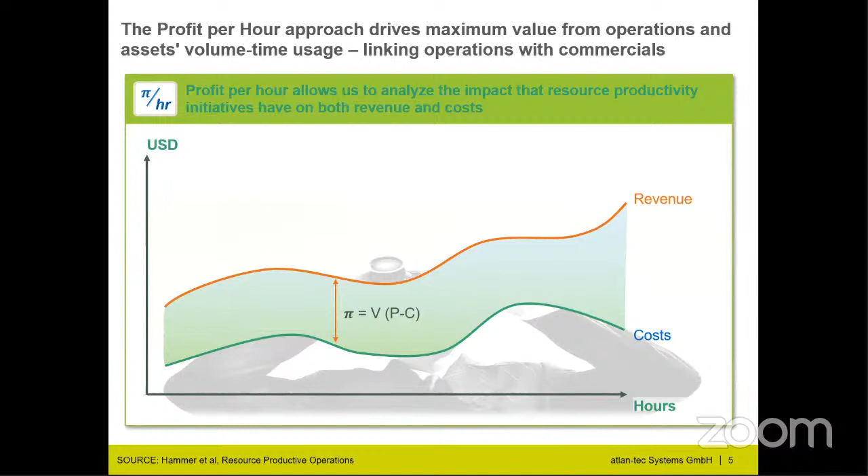But to get this high level of control, you need a deep understanding of the relationships in your process, and that's the reason to use big data analytics. Only this way can you understand how to influence or change manipulable variables to increase your profit. That's the basic idea: if you have a successful project, you can reduce costs and increase revenue, and at the end make a higher profit.

One way to do this is to put your historical plant data - all pressures, temperatures, levels, flows, analyzer signals, laboratory values - into a table. With this table of historical data, you can perform advanced analytics or big data analytics.

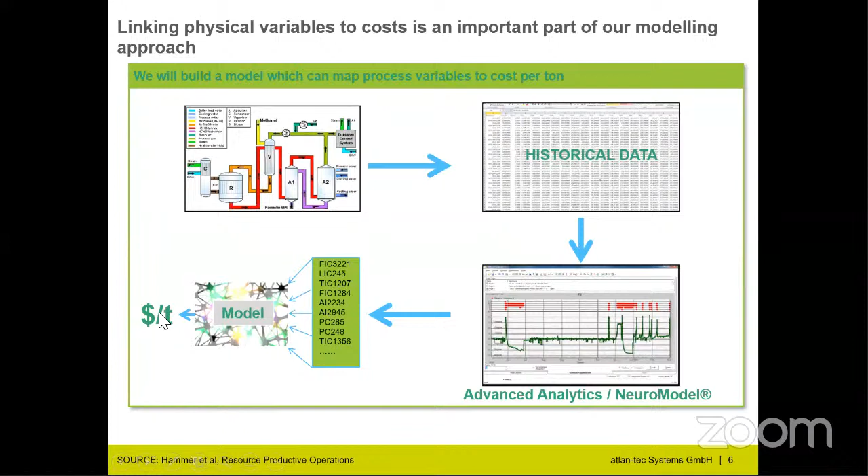We have a tool called NeuroModel, and at the end you get a model with a relationship, a function between your physical variables - some of which you can change or manipulate - and the output of the model is your profit per ton, per hour, whatever. That's the basic idea.

If you have a model like this, you can use it together with an optimizer. You may have one or many KPIs, and you use this model to determine how to manipulate these variables so you achieve your given target quality at the lowest cost. What you see here is a very generic scheme.

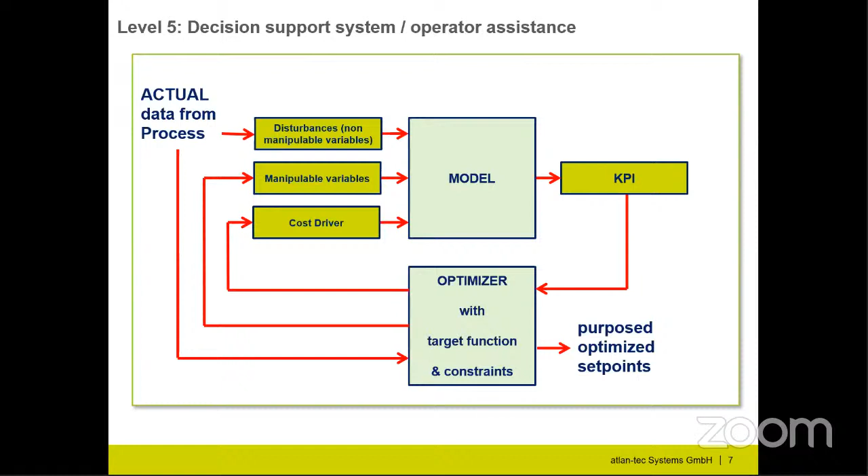At the end you have a precise model that can generate a prediction of quality, of yields, of whatever you are interested in. You get the actual data from the process, and the optimizer calculates the best values for the manipulable variables, generating proposed optimized set points for the process. That means every minute your production will be in an optimal state, and you can maximize your profit.

Okay, how can we do that? My answer is very simple: follow VDI 3714. The VDI 3714 is a standard I would like to present to you, developed in our standardization committee.

We have two initiatives: the standardization committee 727 and the standardization committee 724. That's Richtlinienausschuss, German for standardization committee.

One is STEPS. You have heard about STEPS from Sebastian Schmitz. The chair is Dr. Violett Zeller, and the aim is an objective measurement of the maturity of Industry 4.0. I have told you something about that activity before, and you have heard it from Sebastian.

The second is my working group, or standardization committee. This committee is called Big Data in Production, and we have developed the VDI 3714. The name of the standard is Implementation and Operation of Big Data Applications in the Manufacturing Industry, with the target to optimize your profit. I'm the chairman of this committee, and the aim is to standardize the use of big data methods.

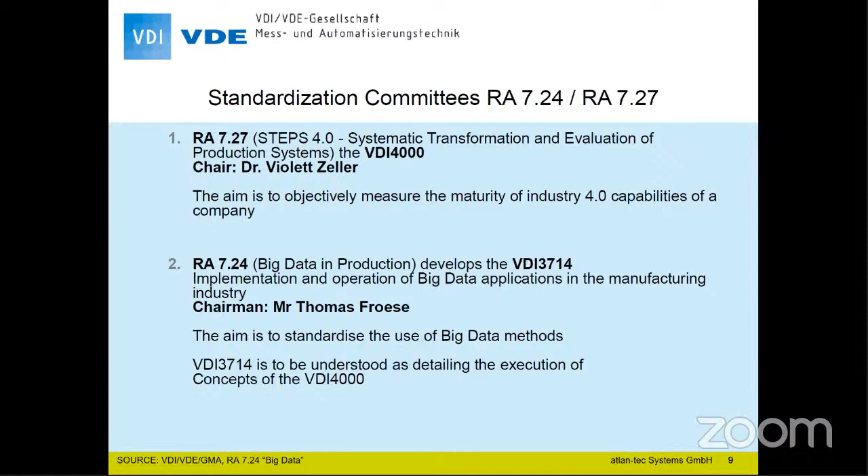Here you can see we have 30 active members. Some companies: Siemens, BASF, Clariant, Wacker, SKZ, IBM, Fraunhofer - some of the companies you will know. I'm absolutely sure these 30 active members are the best people in Germany active in the field of big data analytics and big data operations.

And we have in 2016 published some position or white papers. They are available under the Big Data section of VDI.de. If you are interested, it's no problem - please write me a mail or contact me via LinkedIn. I published these papers on LinkedIn two or three weeks ago.

So if you contact me on LinkedIn, you can grab these papers, and they are very interesting because that's a type of draft of the VDI 3714. That means if you are interested in the content of the standard, you can grab these papers from LinkedIn, from my account, and then you have a very clear picture of what we are doing there.

Sheets 1 and 2 are finished. Sheet 3 follows in the middle of June, and we think we will have finished all the sheets by the end of September. A sheet is not a sheet of paper - a sheet means, you can say, a chapter of the standard. That means we have 7 chapters, and 1 and 2 are finished.

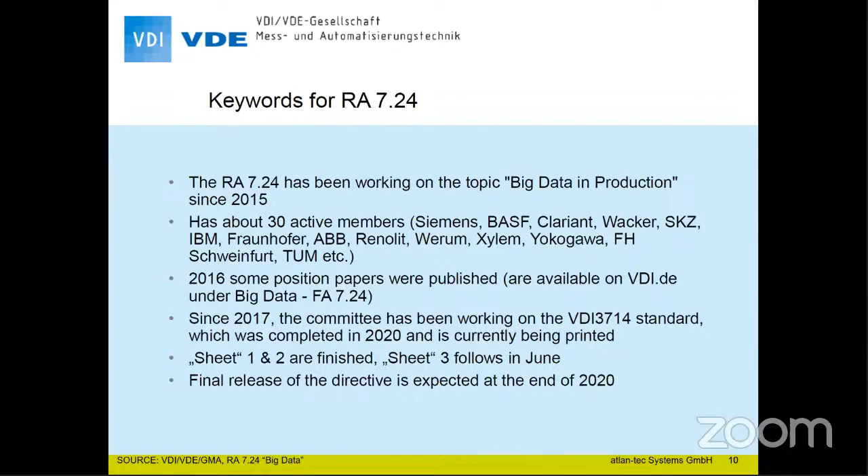That's what you know - that's from the Maturity Center of Aachen. Sebastian presented that a few months ago. That's the reason I say what we are doing: we describe in our standard how you can do that.

The visibility and transparency you can do with the database, that's very simple. But to make a prediction of quality, yield, whatever, and to make your process adaptive - meaning it will adjust itself to the best working point - that needs the algorithms we have described in the VDI 3714.

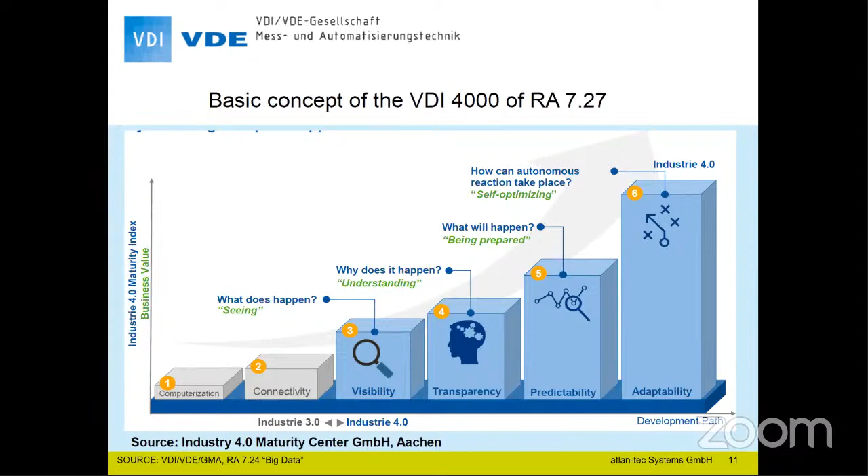Because it's very simple: if you would like to design a model data-driven, also with the data, you need a very high quality of data. And the next sheet is data management, the ETL - extract, transform, load. That means how you have to extract and transform the data to make it available for big data analytics.

Then in sheet 4, we have described analysis procedure classes - that means we have described methods. What's very interesting is that here you can find only methods where we have practical experience, but there are a lot of different algorithms.

And at the end, for implementation, we have only 1 or 2 algorithms that are allowed, because you have a very high increase of safety requirements between sheets 4 and 7. In sheet 4 you only try to analyze data, try to understand relationships, try to work with the data. And in sheet 7, you have to implement.

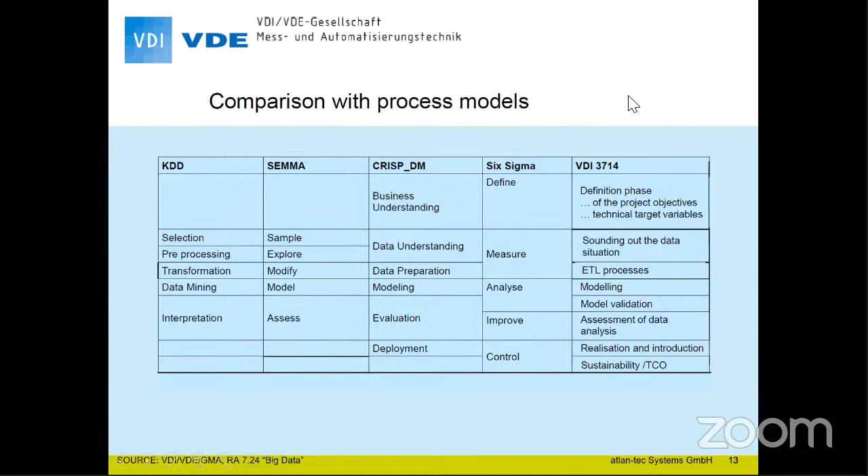You can say, I see the comment from Mr. Rosa, that VDI 3714 is the next generation of Six Sigma, but some of the Six Sigma things and procedures you can use today as you have used them in the past. That means we have done more than Six Sigma has defined, but you can use all the process models. That's very important to know. You can use all these models, that's allowed under this standard, and we give you the free choice of what you would like to prefer. But I think our standard has the highest resolution.

Some general information from this standard: the most important point, following the Industry 4.0 maturity idea, is that you need complete data from the process chain, like the SIPOC standard in Six Sigma - supplier, input, process, output, customer. That means you have to understand from the state of the raw material over the machine process data.

You have to implement full functional product tracking. You have to understand and measure all the process states, and you need an exact digital shadow of your process. Then you need open interfaces, such as OPC UA.

That's a typical standard. All data must be available from one source. As Sebastian has told you, that's the single source of truth. That means you can use one database with all data from the process control system or quality checks of the raw material. All this data has to be available from one point. You can put it in one database, that's one way.

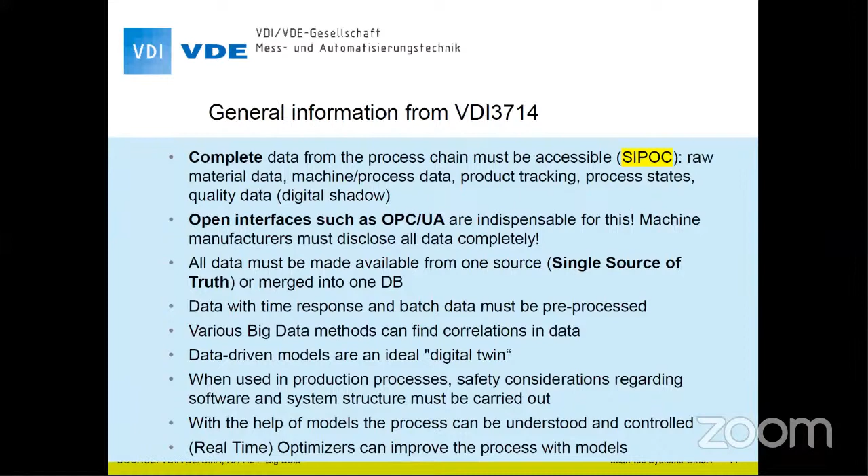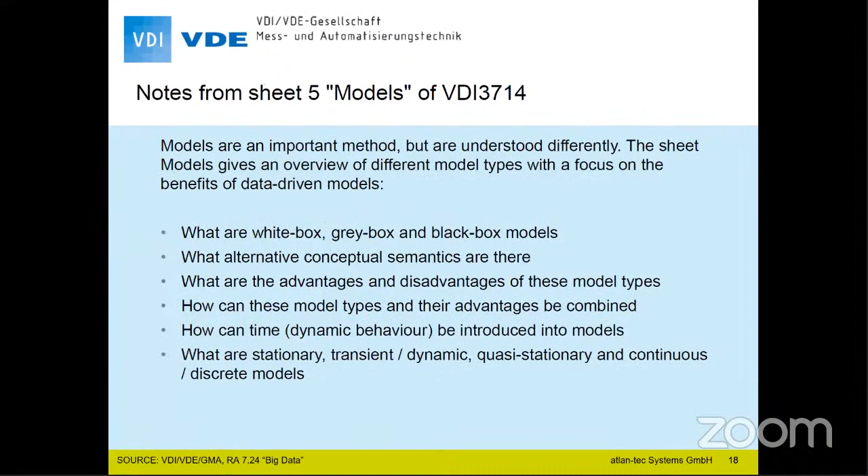I'll jump over these sheets that are more detailed explanations of what I have told you before, which you can read later if you are interested in more details.

I will stop here in sheet 7, because in sheet 7 we go to the point operation of models, and operation is the most interesting point, because if you have a fully functional model, a validated model, you are sure the model is really precise and follows the behavior of your process. That means it's a digital twin. Then you can use the model as a soft sensor.

At first, you can extract knowledge from this model. That's the first step. Then you can use this model as a soft sensor. There are different levels of approaching these models. Then you can use the model as a predictor. You can predict the behavior of the process in the future. And then you can use this predictor for model-based control, not regulation. It's a not so good translation, model-based control.

Then you can implement a closed loop multivariable controller, or you can support the operator in his decisions, and at the end it's the highest level, real-time optimization. That means you can use the model to build a real-time optimizer for your process. And exactly in this chain 1 to 7, you can implement this technology. That means you can start with extracting knowledge and you can end with a real-time optimizer.

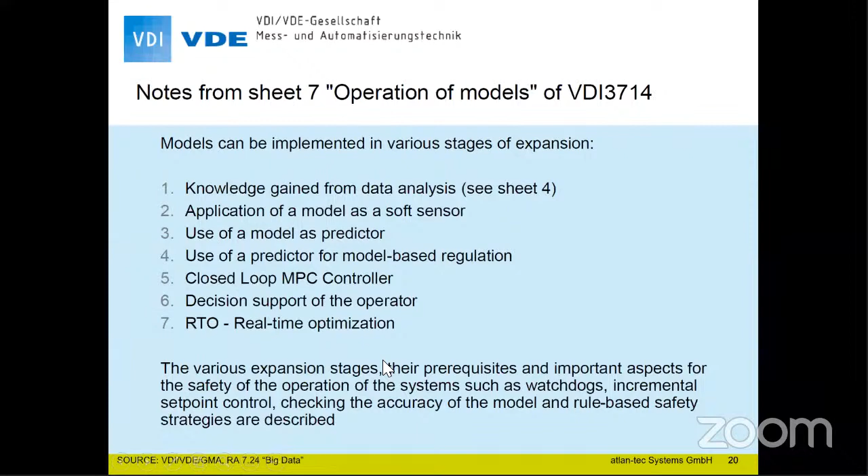Here you can see on a very easy scheme how we work if we do a project and we follow this standard. What you need is very simple. You have to capture all the measurements from your plant into one database. Then you have to capture all the probes from the laboratory, quality of raw material and your product. And then you have to bring all the data into a single source of truth. That means the optimal case will be that you put all the data of your site into one database. And if we have a situation like this, we are more than happy. And that's what we check with our readiness checks.

The readiness check means that we make an interview with you and we ask you, what is the data situation at your site? And with this readiness check, you get a readiness level. And if the readiness level is lower than a defined limit, then we say, hey, please change this, and then we can start with the project. Then we have to find a definition together. A definition means we have to define what is the target function, what you are interested in.

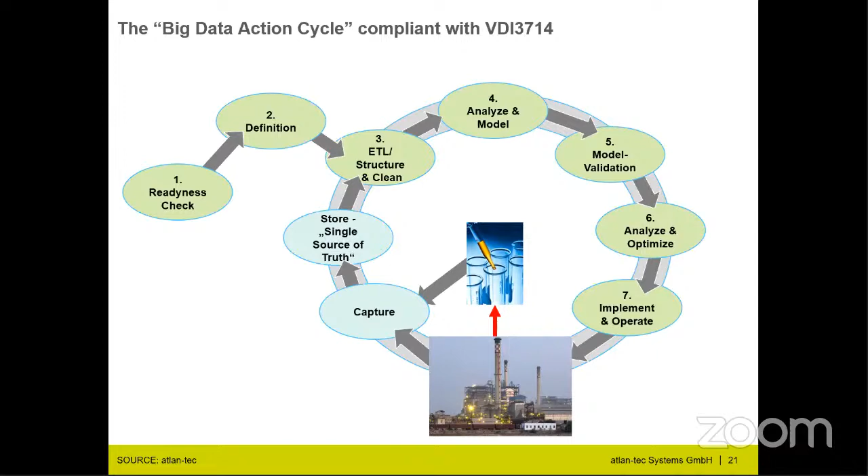And at the end, you have a closed loop. And closed loop means if you have a new condition in your plant, you will generate new data sets, and all the steps will go every day automatically. That means your model will adapt automatically to the process. It will be better and better. It learns different situations. And then you have a closed loop and a fully automated production with the highest quality and the highest output and the highest profit that is possible with this physical setup or situation you have available.

We as atlan-tec, we have our own interpretation of this standard. That means we follow the standard, but we have some specific changes or additional features we have added to the standard. It's very simple why we can do that. We have the experience from more than 1,000 industrial projects. So we have a very easy configurable transformation for batch and continuous plants. That means to configure a batch process, we need maybe 1 day and not weeks.

Then we have software that makes it unnecessary to use data analyst know-how, because we have an expert system that will decide and select automatically the best model available. The models are not open, not editable, and not manipulable, because you have a safety discussion. And with the Food and Drug Administration, you know, you have a lot of discussions. If you try to use open source, then you have to redo all these safety procedures for each project. And if you use a closed and validated software, it is validated and you can use that.

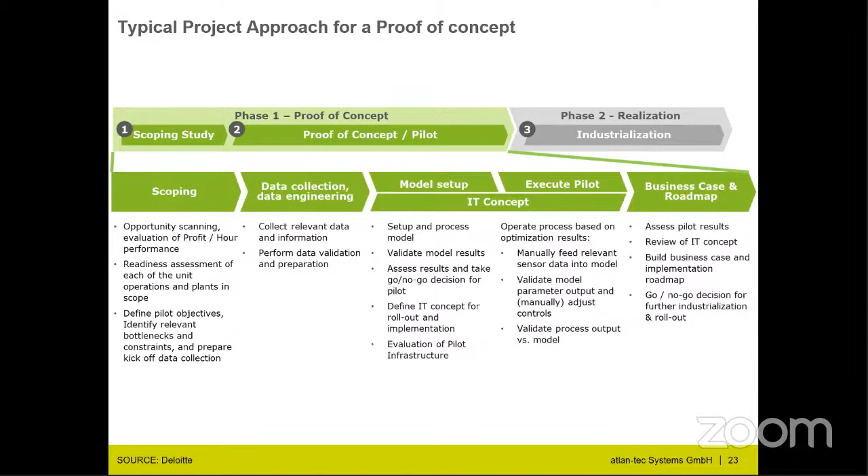Here are two examples of the ETL, this structuration of process data. One is in the case of batch processes. You have a lot of time-dependent measurements for each batch, but only one quality analysis at the end. And we have a specific software called a landmark extractor, and this landmark extractor will generate from these millions of data sets very small fingerprints.

I don't have the time to describe what we are doing in detail, but the definition says all. The batch fingerprint is the smallest set of data to identify any batch without any ambiguity. That means each batch is one record, and we try to bring the record to the most compact format, which you can then put into the neural network to analyze the data and learn what is the impact of changing some of the input variables.

In case of continuous processes, you have a time behavior. Here you have the stirred reactor, for example, and in the case of the stirred reactor, you have a stirred reactor time behavior. If you have an analysis at the end of the plant, you can say, okay, if I grab a probe here at 6 o'clock, it was in this heat exchanger 5 minutes before 6 o'clock. And you can bring the temperature into a causally right relationship with this quality variable.

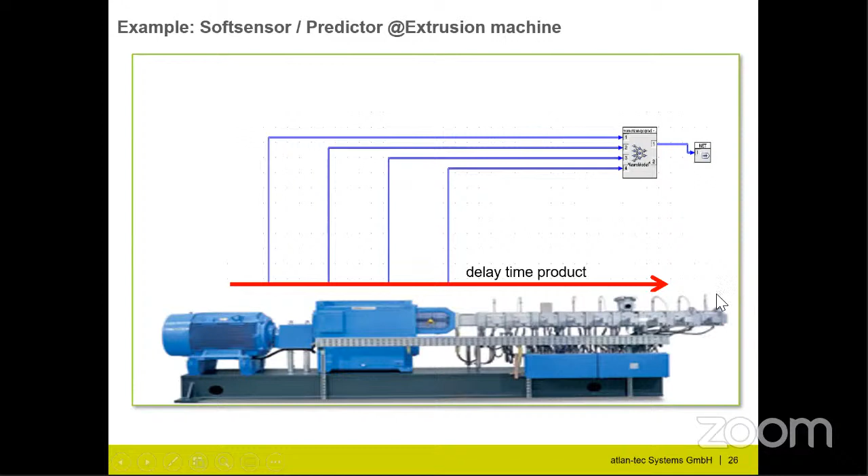Here you can see a very simple implementation on an extrusion machine. That's a predictor. That means if you change, for example, the torque of this machine, that will be an input signal to this model, and this model will predict a physical property of the polymer that will leave the machine at the end.

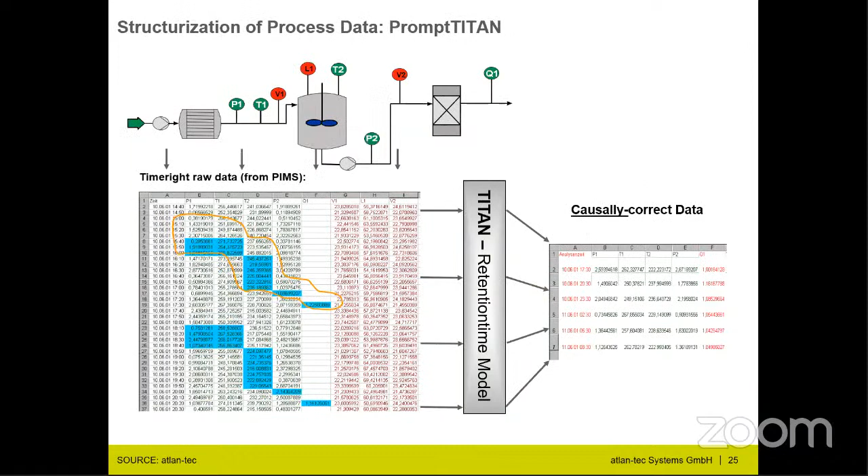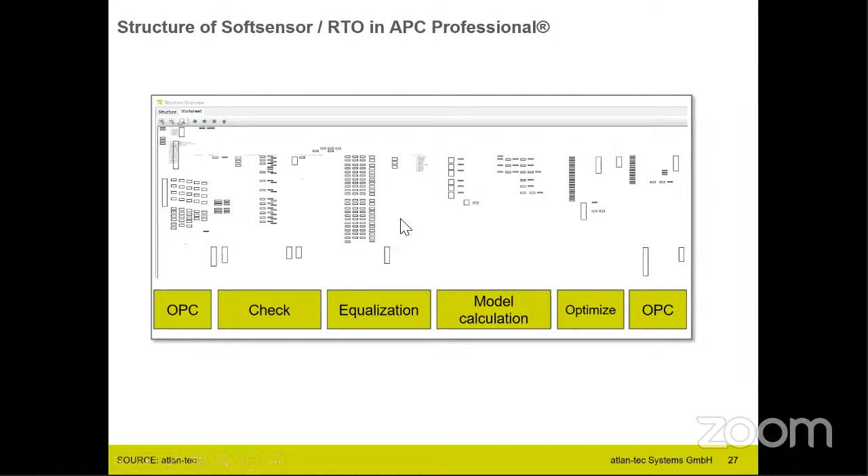And now I will show you a zoom to give you a feeling for how it works. You see these are function blocks. You can bring them together. This here, for example, is an average value, the average of the last 8 hours in this example. And here you have the soft sensors. That means these are the machine learning modules.

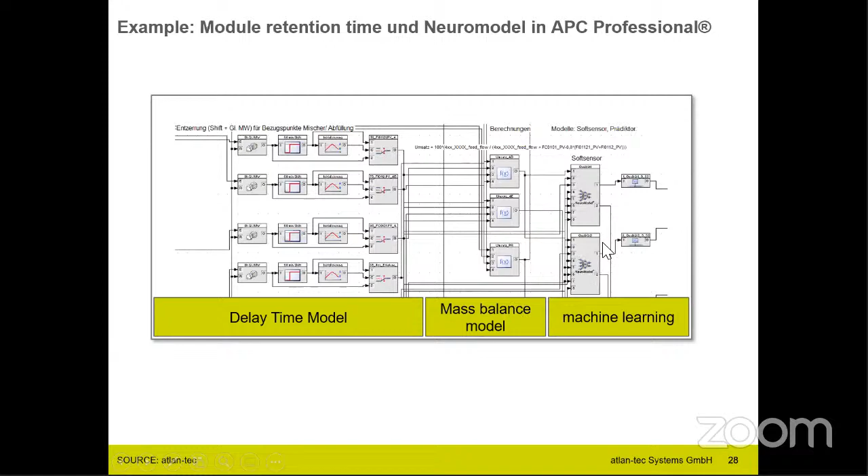Here we have, in this case, used a mass balance to check the quality of the variables. I know in most chemical plants the mass balance is not accurate. That's not a problem, but a problem is if it has a drastic change, then you know something is wrong. So with these mass balance modules, normally we check only the stability of the mostly wrong mass balance. And here you go to the machine learning, and then you have a decision, and the decision will go to the control system.

That's a big example, and this example is interesting for one reason. We have a cooperation with Chem Stations. You know, Chem Stations is one of the companies, I think it's number 2 worldwide. They build first-principle-based models, physical models. And recently we had some projects where we worked together with ChemCAD.

And the interesting point is, for example, ChemCAD is very well able to predict the behavior of distillation columns. They have really very precise models, but they are not able, for example, to predict the behavior of some reactions, or if you have a gas phase reactor with a solid catalyst, they are not able to predict this behavior. And if you put both models together, you have an ideal combination between white box and black box models. And so you can build very, very complex systems.

That's only a part of the system we have implemented on the customer side. To give you a picture, the biggest systems we have implemented have 38,000 function blocks. So you can see what is possible. And big data analytics is a very important part of these models and this solution.

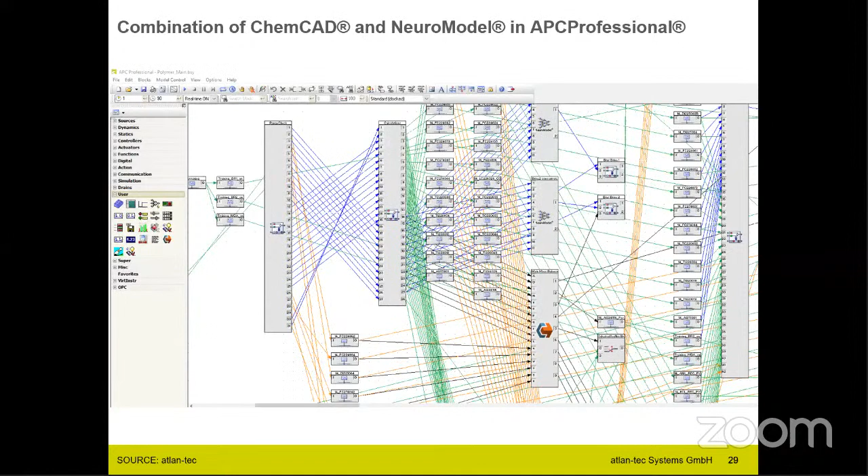Okay, then at the end, I think we have 10 minutes. I will show you some successful applications we have done. Most of them are from the chemical industry, but we are able to do projects in the pulp and paper industry, in the textile industry, in the plastic industry. So we have a lot of applications. You can imagine, we have 1,000 successful industrial projects.

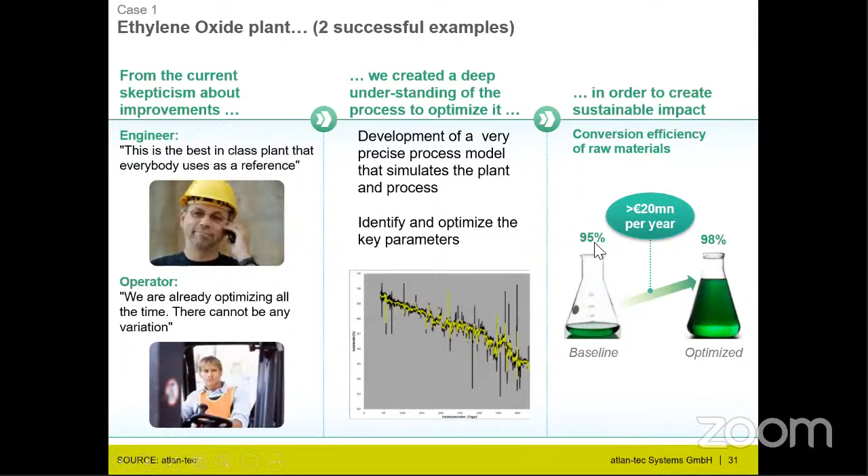The first application is in an ethylene oxide plant. Ethylene oxide is a very important basic chemical. But you know, ethylene oxide is poisonous, explosive, burnable. So you have a lot of different reasons to make an application like this very safe. And here, in this case, we have saved €20 million per year because we have brought the baseline from 95% to 98%. Here you can see the accuracy of the model.

Now you have the question why the selectivity, the target function we have, will decline. That's very simple. That's the aging behavior of the catalyst over days, 0 to 500 days. And you see the catalyst is a solid catalyst, has an aging behavior, and we can predict very precisely the aging of the catalyst and the behavior of the plant. The black is the real measurement of the analyzers, and the yellow is the prediction of our model.

The second example is from a company. They do a type of polymerization. You have two adducts and one catalyst. They put them together in a reactor, and then they have a heat exchanger to cool the reactor because it's an exothermic reaction. And the tricky thing is you have to cool in a way that the temperature will not be too high. Otherwise, you will get a color in the product. Or at the end, carbon. You are not interested in producing carbon if you would like to produce polymer.

That means you have to cool in a way that you can control the reaction, but you don't want to cool so hard that you stop the reaction. So it's a very fine adjustment you have to do. And we have two correction parameters. One is enthalpy, so we can measure the amount of heat we extract by the cooling heat exchanger here from the reactor. And we have a signal for the viscosity.

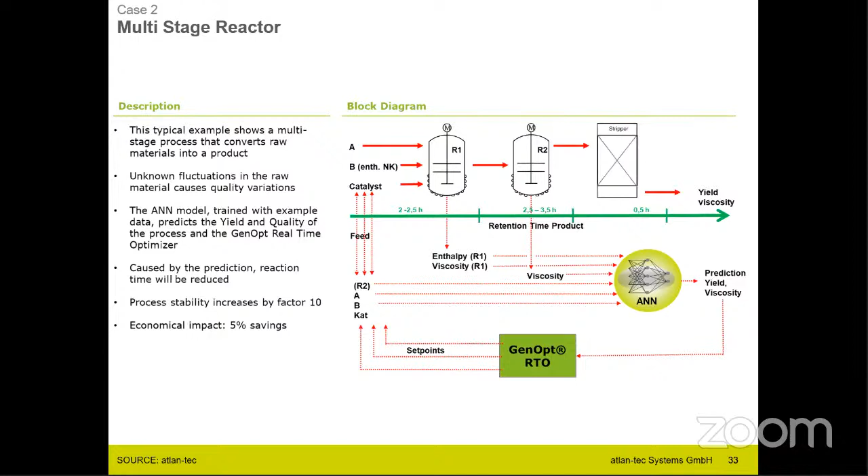Then we have an implementation together with Huntsman. Huntsman, I think they are known in Brazil. Huntsman is a chemical company from the United States. They have published this project we have done together, and you can see only the result of the project.

We have here a separator for a water-based mixture and an organic mixture, and we have to separate them. The organic is a product that goes to the production of isocyanate. Isocyanate is a raw material of polyurethane. It's a polymer. And we have a wastewater treatment plant, and you are not interested in putting too many organic substances into the wastewater treatment plant, because in that case, the microorganisms in the treatment plant will die. Then you have to stop your plant. And that's the reason the operator has driven the plant very carefully, and carefully means wasting energy.

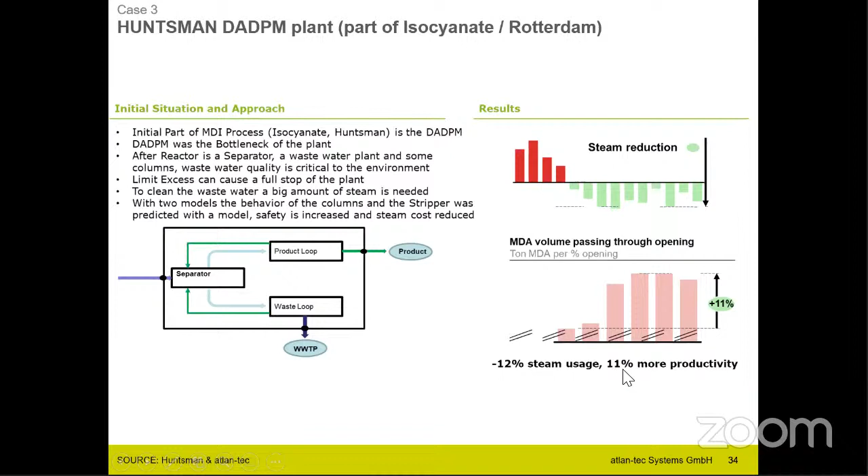And we have implemented our system, and here you can see the effect. We have reduced the steam usage by 12%, and we have produced 11% more product. And that's a lot. It's a mass of money. They don't speak about the money, but they speak about the big success. And at the moment, we are doing some further projects together with Huntsman in Rotterdam.

That's what we have done in a methanol plant in the Near East. Here you can see the drive of the operators, and here you can see the drive of our optimizer. The unit is profit in dollars per hour. And that means we have saved this customer 3 million per year.

And if you calculate a project like this, if you have a good situation in a plant, it needs 2 months, 3 months. The costs are between, depending on the situation, 100 and 350,000 euro. And you save 3 million per year, so you can say you have a return on investment of 4 weeks, 5 weeks, something like this. So it would be foolish not to do a project like this, but you can't imagine how many companies in the world are fools like this.